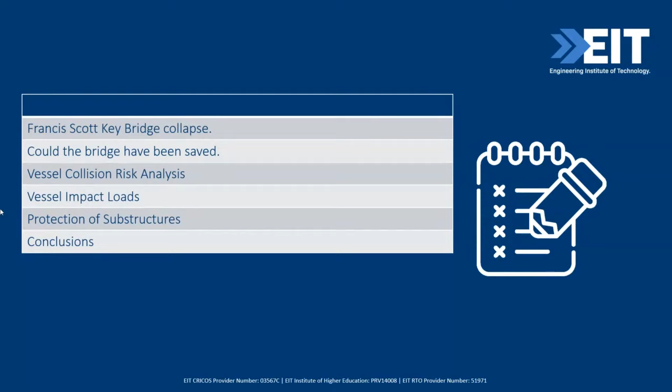As the disaster happened on March 26 this year, 6 weeks ago, at about 1:30 a.m. local time, a container ship hit one of the pillars of Francis Scott Key Bridge, which had an overall length of 1.6 miles crossing the Patapsco River in Baltimore. This collapse caused 8 construction workers and 3 vehicles to fall into the water. Unfortunately, 6 people were reported missing, out of which 3 bodies were recovered and the other 3 are presumed dead. 2 people were rescued from the river; one had no injuries, while the other had to be taken to the hospital and survived the disaster.

For the structural collapse, all 3 main steel truss spans collapsed together with 3 approach girder spans on the northern side.

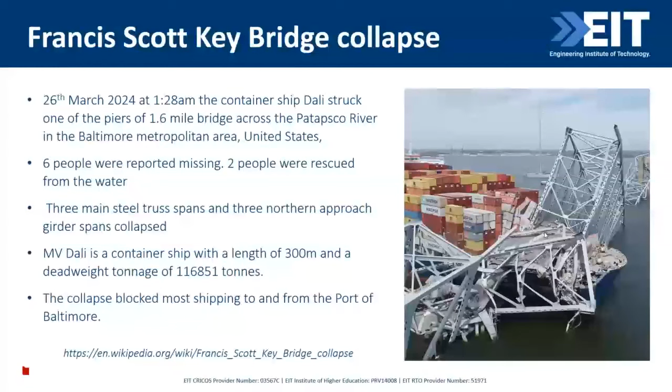The bridge collapse blocked most shipping to and from the port of Baltimore for a few weeks. On top of this, the traffic needed to use alternative ways.

Now, the Francis Scott Key Bridge was a steel arch continuous through truss bridge that spanned the lower part of the Patapsco River and outer Baltimore Harbor. The Key Bridge was named after the author of the U.S. national anthem, Francis Scott Key, who was believed to be near the site of the future bridge at this time.

He was there in 1814, serving in the army. When observing the bombardment of Fort McHenry nearby, this battle inspired him to write a poem called 'The Defense of Fort McHenry.' This poem was later set to music and renamed the Star Spangled Banner, which is the U.S. national anthem at the moment.

The construction of the bridge started in 1972 and was completed in March 1977, so about 5 years. This is an important date for our discussion, as the federal regulations for protecting bridges from ship collisions were updated in 1991 after another truss bridge, the Sunshine Skyway Bridge, collapsed in 1980. The existing bridges in 1991 actually were exempt by a so-called grandfather clause.

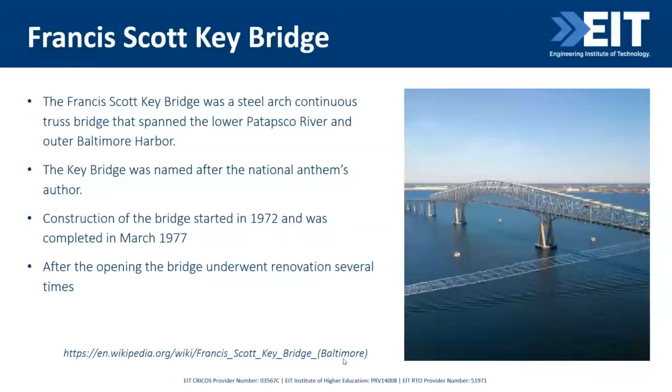A bit more detail on its structural arrangement: the bridge itself spans 1.6 miles, about 2.6 kilometers, over the river, but the overall crossing structure, including its connecting approaches, is almost 14 kilometers long. The steel truss section was 805 meters, with a maximum clearance of 56.4 meters, and the longest span was 366 meters.

It was a very busy bridge. According to the Maryland state government report, on average 11.5 million vehicles crossed it, and in 2023 alone the report states 12.4 million vehicles crossed the bridge.

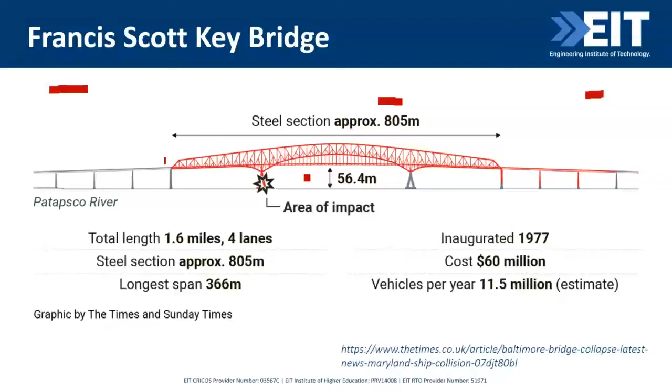Whether the Francis Scott Key Bridge could have been saved is a complex question with no definitive answer. There are ongoing debates among experts. Here is what we know.

The bridge had a fendering system designed to absorb impacts, but the severity of the collision might have overwhelmed it. Some engineers believe stronger defensive measures, like an improved fendering system, could have lessened the damage. Others argue the force of the colliding ship might have been too great for any current technology to fully prevent the collapse. Officials are still investigating, so a clearer picture may emerge in the future.

The bridge's continuous truss is known to be sensitive to progressive collapse type failure. As such, this type of truss has no redundancy against removal of any part of it, in particular one of the supports.

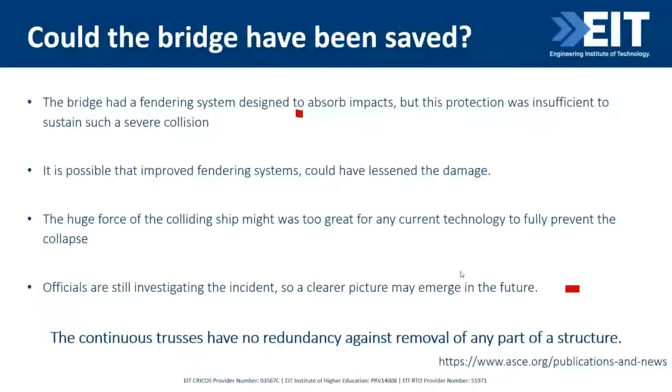I can't turn this video. Why can I not do this? Yeah, right.

At the moment, all the information we have is the video footage of the collapse, and this fits the concept of progressive collapse clearly. You've seen this footage, many different videos released over the internet. This is the main one.

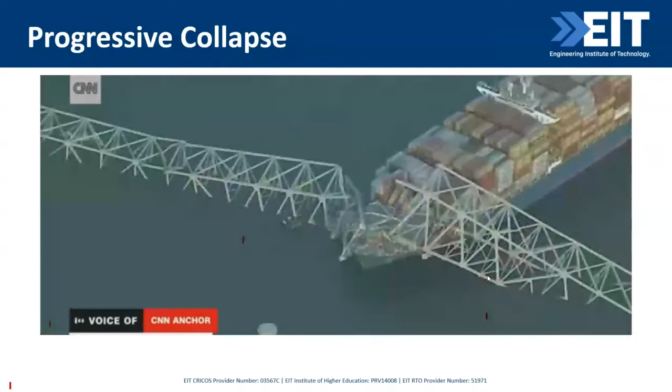Let's restore the chain of events. I will use this schematic representation to follow the collapse stages through. Here's the bridge with the main truss and the main dimensions for the truss part.

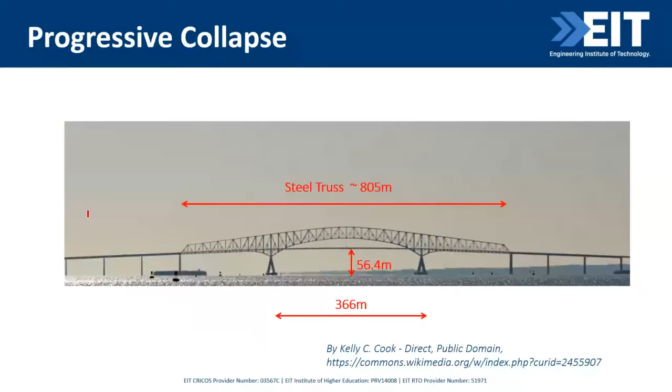This structural form is a combination of an arch bridge and a suspension bridge. The continuous arch structure — that's the truss structure here — and about the supports, provides the horizontal thrust for the arch structure. This is the arch here, and it's designed to reduce the thrust as well.

Instead of an arch supporting the structure from below, the arch here rises above the road, and the vertical ties descend to increase support of the decking. It's an extremely strong arrangement because the arch design allows the forces from the deck to go to the arch through hangers, which means no single part of the bridge takes on a high amount of pressure, and as a result isn't designed to handle it.

So we see here the trade-off — advantages which turned out to be disadvantages in terms of the progressive collapse issue.

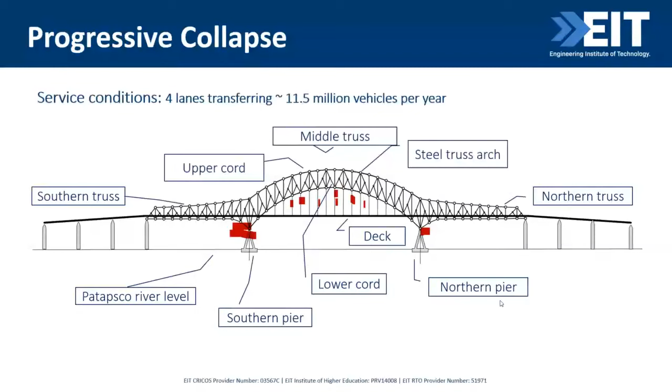So what happened? The cargo ship loses control and collides with the southern pier. Though the ship wasn't built for speed, it was going relatively fast — about 8 knots, roughly 9 miles per hour. That doesn't sound like much, but with a weight of over 116,000 tons, even at 8 knots, the sheer mass of the Dali threw a massive amount of force against the bridge support. The bridge support was a structure primarily designed to withstand downward forces, not sideways forces.

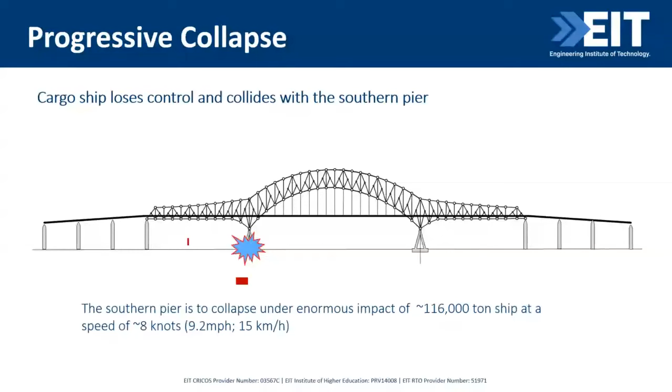Under this collision force, the pier collapses and is essentially completely removed. The southern truss — this is south, this is north — the southern truss buckles and fails.

The whole truss moves sideways due to this. It all happens in a matter of instants, fractions of a second. The northern end lifts off the pier, no longer connected to it, and the whole structure rotates over the support.

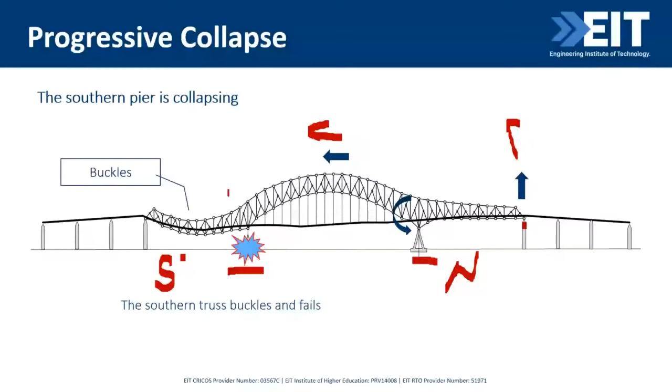The support then acts as a pivot, exerting additional force on the pillar. The members of the truss now experience forces exceeding their design capacity and fail while the whole truss is already in the air.

Next, the southern truss collapses under the sideways force and falls into the river. The middle span is no longer supported, and with no support on the left, it becomes a cantilevered end, and it breaks at the top chord here.

You can clearly see the structural arrangement changing. This truss was not built to withstand these tensile stresses at the top chord at all.

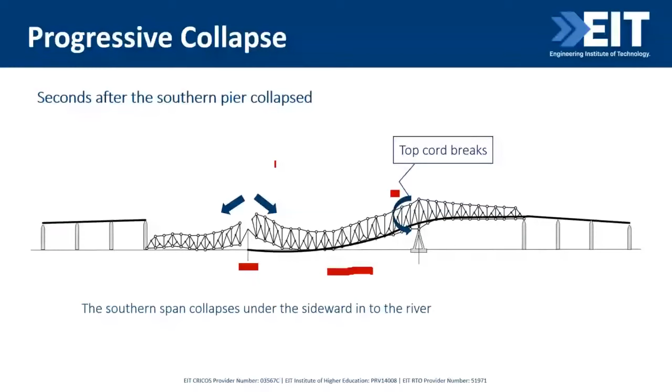The middle span then snaps, immediately near the northern pier. The top chord breaks and it all falls into the water. The remaining sections of the northern truss pivot backwards, causing the failure of the approaching girder spans — causing the failure of these parts as well.

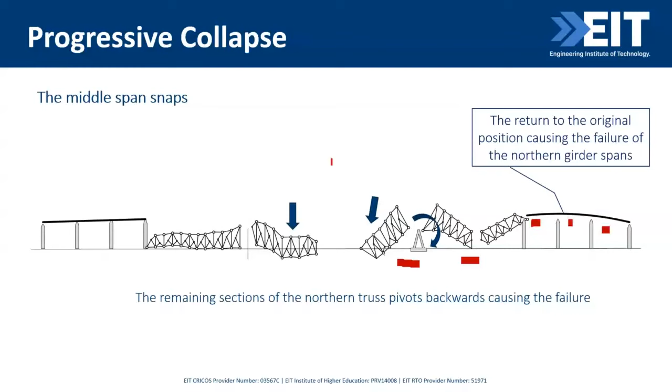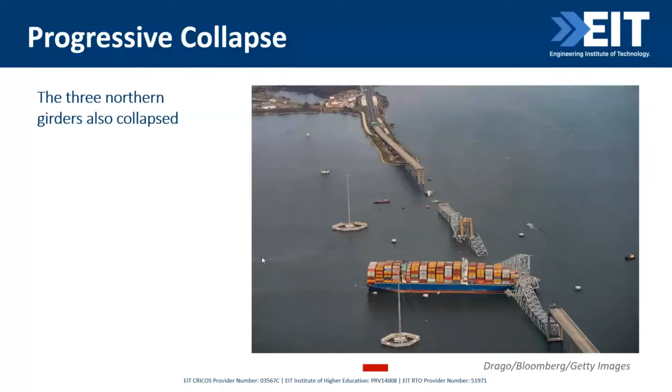The three northern girders also collapsed into the water, and that's what we see at the end. As you've seen in the video, all this story took less than a minute. That's the essence of progressive collapse, and that's the problem of truss bridges, especially continuous truss bridges.

However, it wasn't the first time this type of bridge and this type of failure occurred in the US. In May 1980, a freighter ship ran into one of the bridge piers of the Sunshine Skyway Bridge at Tampa Bay, Florida. Here on the picture, before and after. The bridge was very similar in dimensions, actually 366 meters, and similar height, but it was more disastrous. 35 people were killed in this disaster.

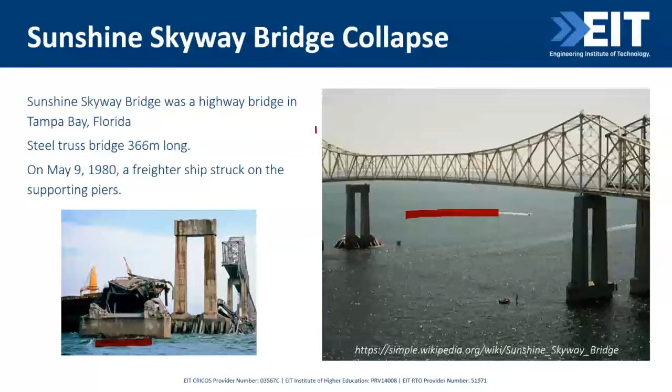Even more recently, a couple of cases in 2013, just 10 years back, a freight truck struck the overhead structure of the Skagit River Bridge, a truss bridge in Washington state, causing a partial collapse, but extraordinarily killing no one there. So all this, as we see, wasn't really new for civil engineers or bridge engineers.

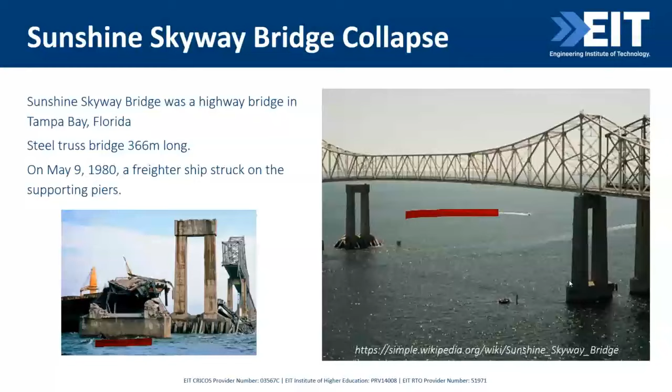The Sunshine Skyway Bridge was rebuilt, but using different structural forms. The new bridge uses a cable-stayed structural form, for a couple of reasons. The main one is that it provides higher redundancy levels and provides longer clear spans.

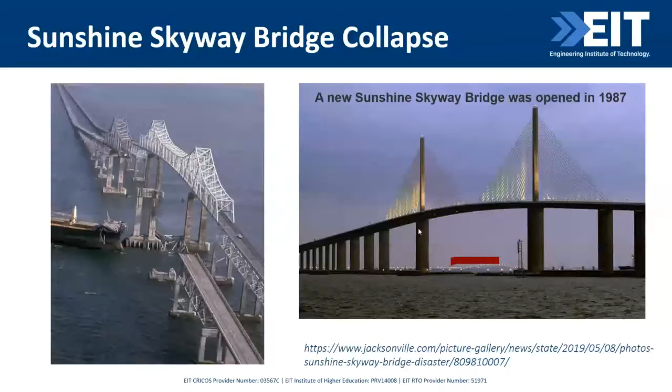In response to the Sunshine Skyway Bridge collapse, AASHTO set new standards for highway design and construction in the US, addressing vessel collision with support piers. And that's what we want to look at next, to show you how AASHTO sets out the recommendations for modern design of bridges for vessel collision.

In navigable waterways where vessel collision is anticipated, structures shall be designed to resist these collision forces. The vulnerability of a bridge to vessel collision is affected by factors including waterway geometry, water stage fluctuations, current speeds, weather conditions, vessel characteristics, navigation conditions, vessel size, speed, loading conditions, and bridge parameters such as bridge size, location, horizontal and vertical geometry, structural redundancy, and effectiveness of existing bridge protection systems.

Vessel collisions with bridges are extreme events, associated with a great amount of uncertainty, especially with respect to the impact loads involved. As with other types of extreme events, it would be too conservative and not economical to design the bridge for the worst case scenario. That means a certain amount of risk must be considered acceptable. The design objective is to minimize, in a cost-effective manner, the risk of catastrophic failure of a bridge, reduce the risk of vessel damage, and environmental aspects should be taken into account as well.

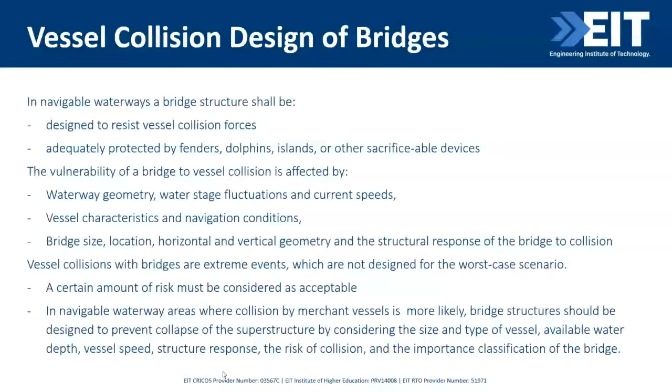AASHTO provides three alternative design methodologies: method 1, 2, and 3. Method 1 is a relatively simple, semi-deterministic procedure for selecting the design vessels and computing the collision impact loads. It's particularly useful for shallow river waterways, where the vessels or barges are approximately the same size, so the forces can be easily estimated in a more accurate way.

Method 2 is a probability-based risk analysis. This procedure can be used for directly assessing the risk of collapse from vessel impacts and developing vessel impact criteria for the design. In method 2, a mathematical model is developed to estimate the annual frequencies of bridge collapse, and the probability of accidents leads us to the predetermined acceptance criteria.

Method 3 is the cost-effectiveness procedure, where the benefit-cost analysis is combined with the risk of a potential bridge collapse to determine the applicable design vessels. Method 2 is the preferred procedure, which we will discuss next.

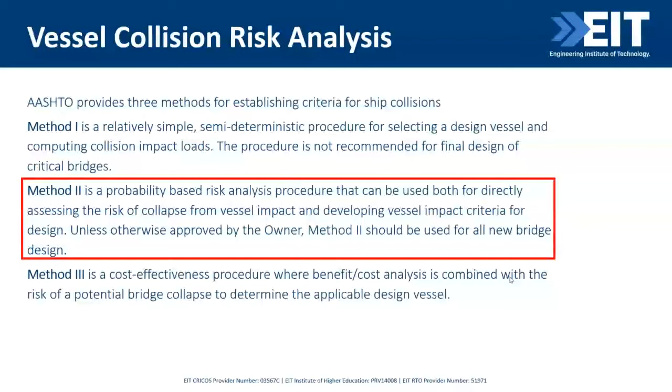In general, the occurrence of collision is separated into 4 events. A vessel approaching the bridge becomes aberrant. The aberrant vessel impacts a bridge element. The bridge element that it hits fails. And the protection factor based on bridge location and nearby waterway features.

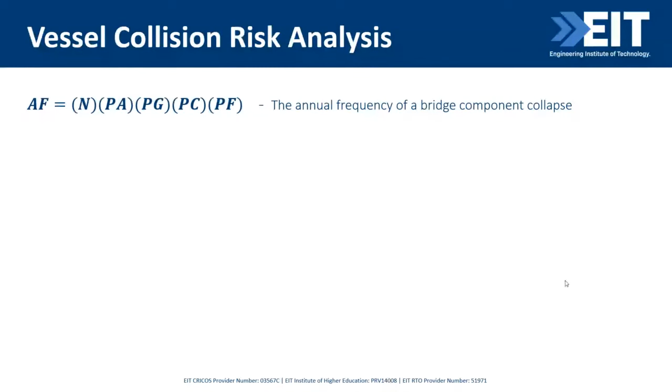So the AASHTO risk equation shown here provides the annual frequencies of collapse for single bridge elements in terms of these factors. PF, the protection factor, accounts for land masses or nearby structures that may be able to protect the bridge. PC is the probability of collapse, providing the probability of collapse for the whole bridge if a bridge component is hit by an aberrant vessel.

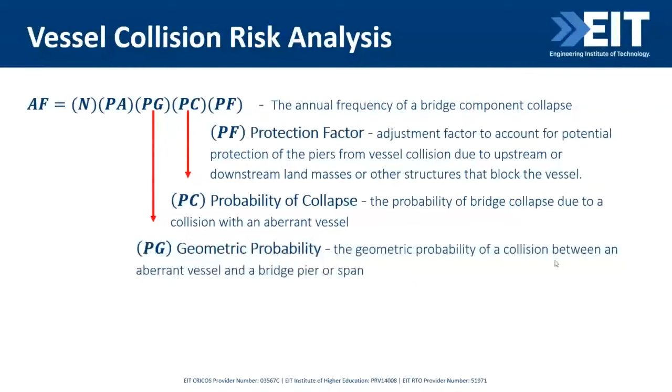PG is the geometric probability, the probability that an aberrant vessel will hit a part of the bridge. The next one is PA, probability of aberrance, a measure of how often a vessel might go off course. The last one is the annual number of vessel trips classified by type, size, and loading conditions that use this particular water channel and are able to strike the bridge element.

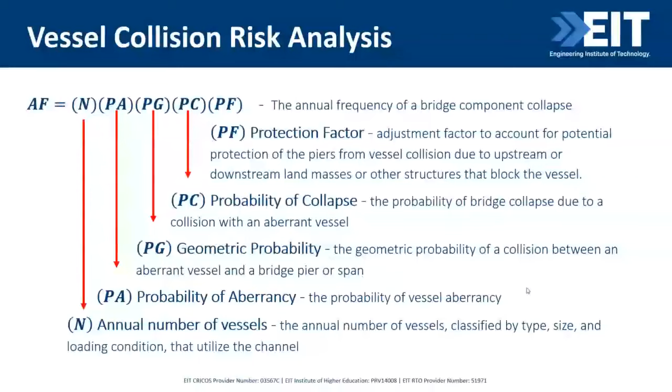Once all this input information for the analysis has been collected and developed, the previous coefficients, which is usually the most time-consuming part of the process, the risk evaluation can be made up by summing these factors, these analysis factors for each bridge component, for each vessel separately, and transit path in the analysis is formed.

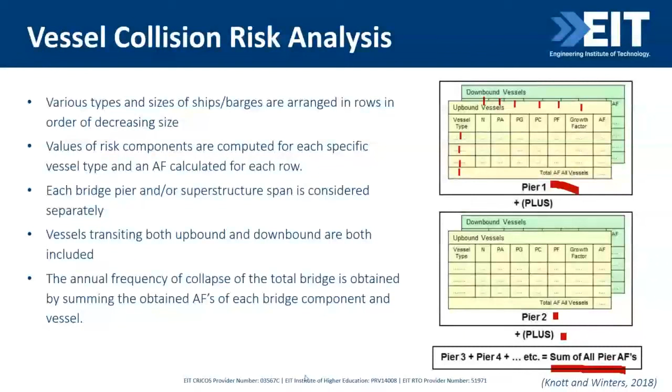Once we calculated all annual frequencies of bridge component for all conditions, I'm just repeating this part, we sum them up and obtain the annual frequency for the overall bridge. So this frequency, this AF, if we inverse this annual frequency of collapse, we will get the return period in years of the failure event.

A similar approach for risk assessment is used in other areas of structural engineering in terms of extreme events: earthquake engineering, blast, the protection for blast loads, and so on.

AASHTO provisions specify the annual frequency of collapse at 0.0001 for critical bridges, and 0.001 for regular bridges. Critical bridges are defined as those bridges that are expected to continue to function after the major impact, due to importance level. So there's the same idea of importance levels popping up here as well.

We've seen this in different areas of structural engineering as well. These annual frequencies will correspond: this and this will correspond to 1 in 10,000 years, and this one is 1 in 1,000 years respectively. Obviously this does not imply that the structure is expected to last 10,000 or 1,000 years, but that during this nominal design life of the bridge, say 100 years, the risk of collapse due to collision by a vessel in the design fleet will be very small. That's the idea of this.

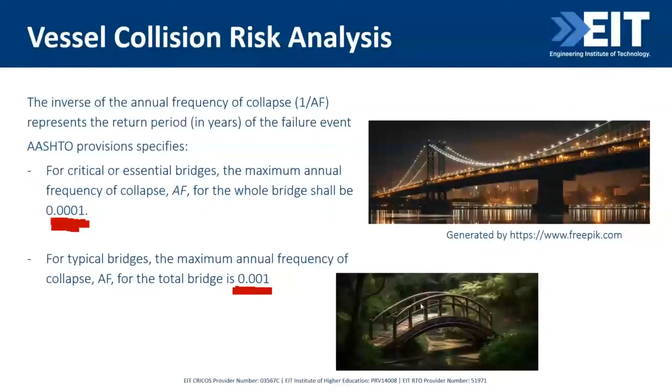So the number of vessels, we haven't discussed this one yet, and I just want to go through all these factors briefly to show how we calculate them. We'll start from the number of vessels that could potentially strike a bridge element. It's based on available water depth and actual draft of the aberrant vessel. Again, we need to specify a number of possible vessels there, which should be assessed based on the current conditions there.

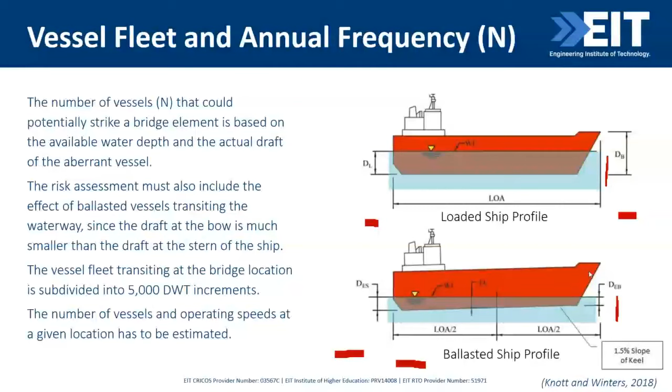The probability of aberrance, PA - let's go quickly through these different factors to understand what they mean.

We don't have much time left, huh? We wasted too much time at the beginning, right?

The probability of aberrance is a measure of risk that a vessel is in trouble and may stray off course as a result of pilot error, adverse environmental circumstances, mechanical failure - whatever happened to the MV Dali in our example. AASHTO offers the following approximate method. To calculate this PA, we have a number of different factors which can be found in the standard, which we will look at.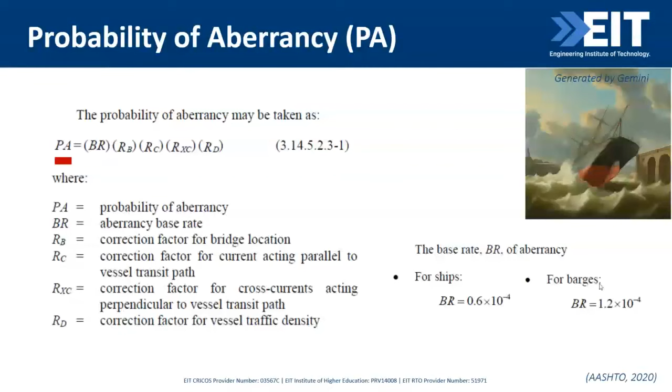Probability overall - the BR, aberrancy base rate, based on historical accident data of waterways. The RB correction factor for bridge locations is computed based on the relative location of the bridge to one of three waterway regions: straight, transition, and turn bend. Depending on where the bridge is on the waterway, this RB will take different values.

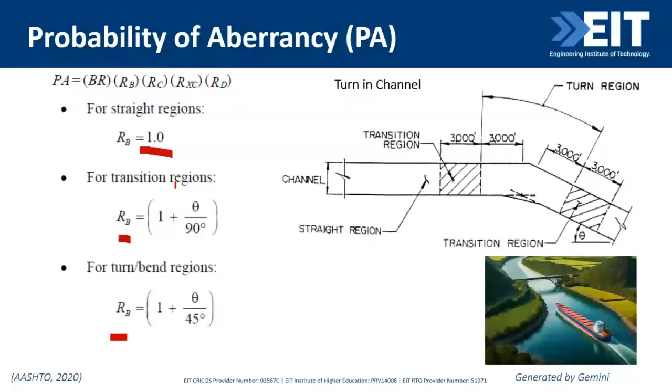It's based on the geometry of the channel and the position of the bridge on it. Next are the correction factors for currents acting parallel or perpendicular - depending on the way the bridge is set and the water currents there. You also have ways to calculate this RC factor, taking into account current velocity components and so on. All this is described in AASHTO, in the standard.

I will probably rush through this. The main idea here is that bridges should be designed to cross the navigation channels at right angles, and they'd better be symmetrical with respect to these channels.

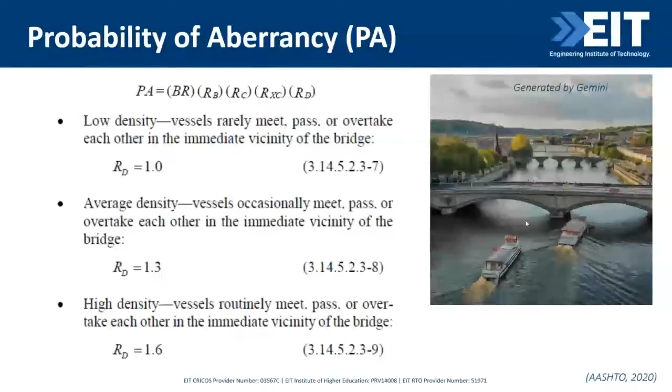Next is the probability of aberrancy - RD, the correction factor for vessel traffic density. In the immediate vicinity of the bridge, this is determined by whether the structure is located in a low, medium, or high density area. For this, we use the geometric probability, as shown in these schematics.

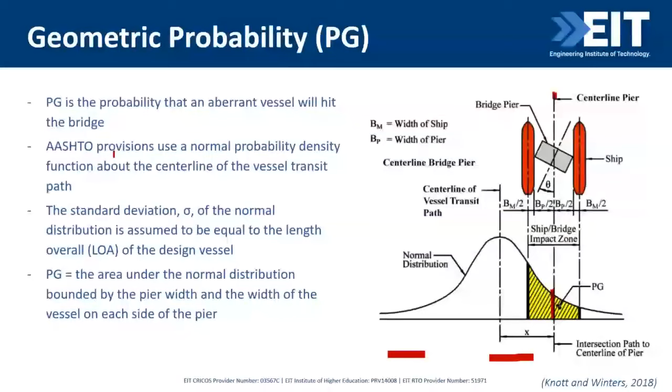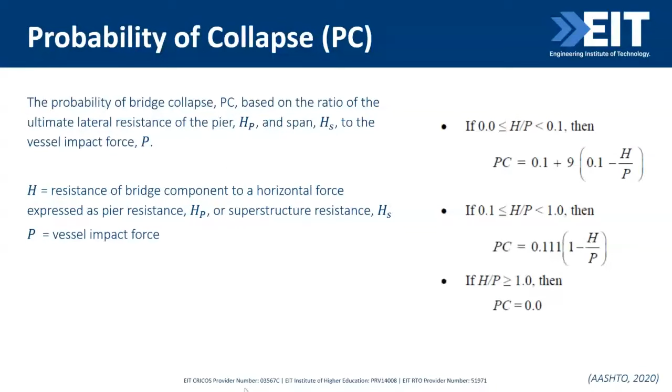The protection factor is used to adjust the annual frequency, AF, for full or partial protection of the bridge piers and its span components. It's taken regardless of actual water depth, and this is where we take into account protection measures or shielding associated with existing conditions - for example, protection measures which we'll look at shortly, or existing upstream or downstream natural protection, such as a shoreline or peninsula extending out. This all provides natural protection in addition to any artificial protection we want to provide.

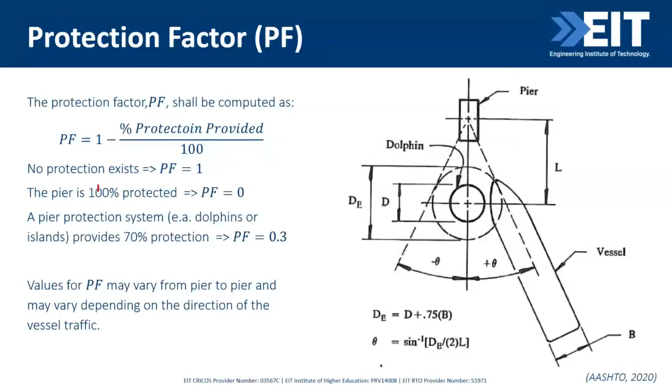So all this protection factor is actually calculated for all the different means of protection, and then it's also evaluated as a probability distribution in this case.

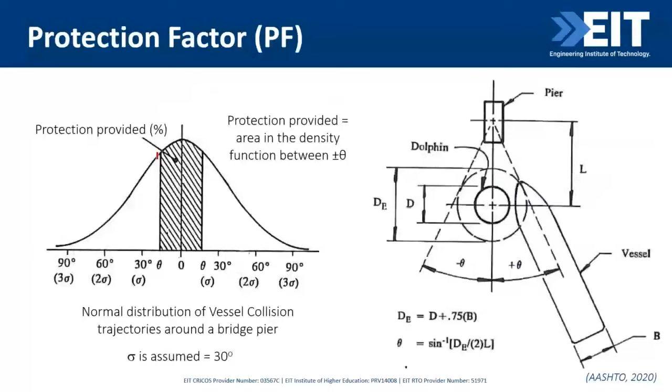So the next step is to estimate the impact loads on the bridge pier during a ship collision. Again, it's a very complex problem. The actual force depends on time, the ship collision forces. But as we commonly do in structural engineering, we use equivalent static forces in this case, applying them statically. So we need to know two things.

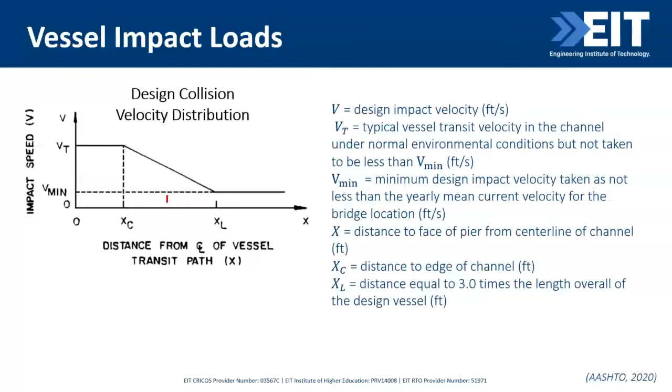So the hydrodynamic mass coefficient is taken here as proportional to the increasing vessel displacement tonnage, W in this case.

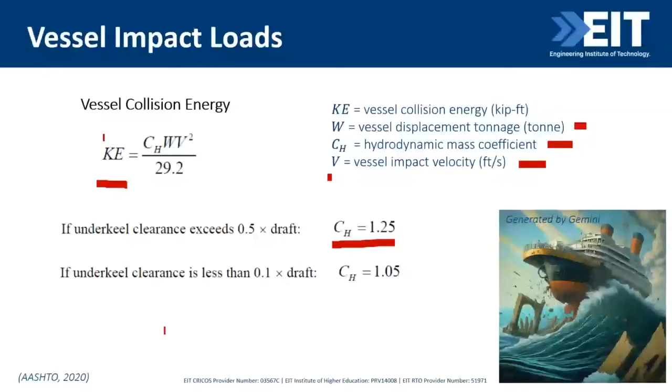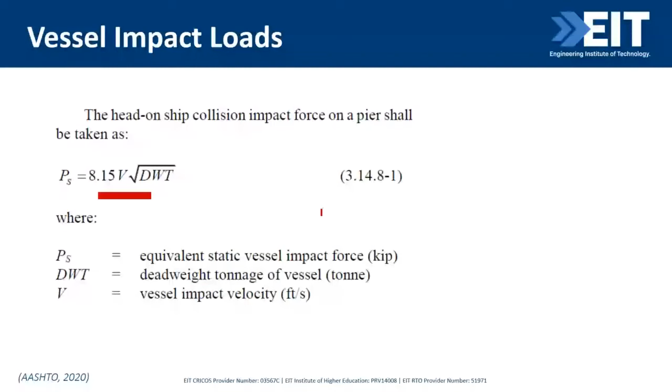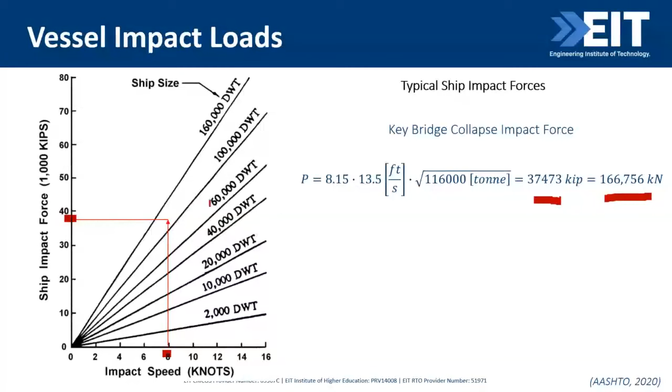So there are formulas for computing the design ship collisions for lots of different situations. For some different reasons we're running very much out of time, so we'll probably skip a couple of slides.

So the impact loads for different types of loads: we've got ship bow impact force, deck house impact force, and so-called ship mast impact force. All these expressions can be found in AASHTO.

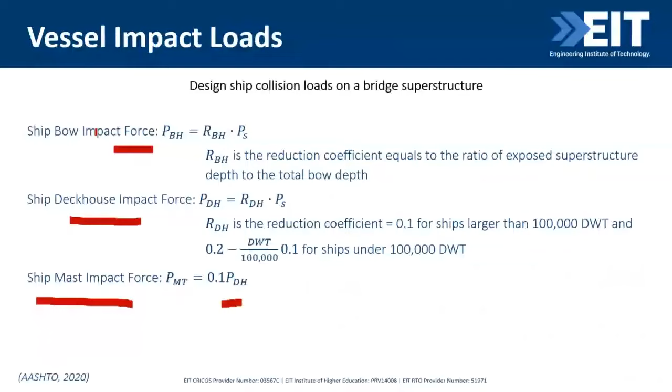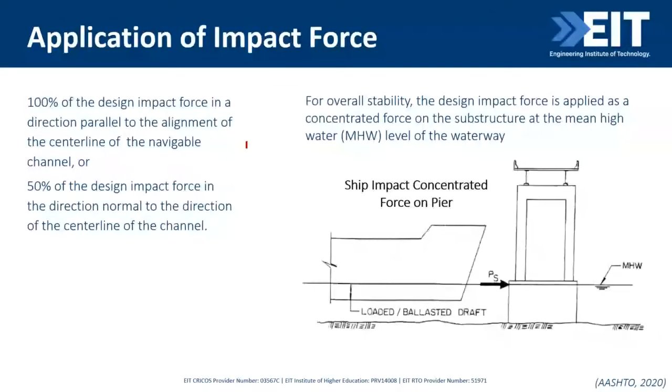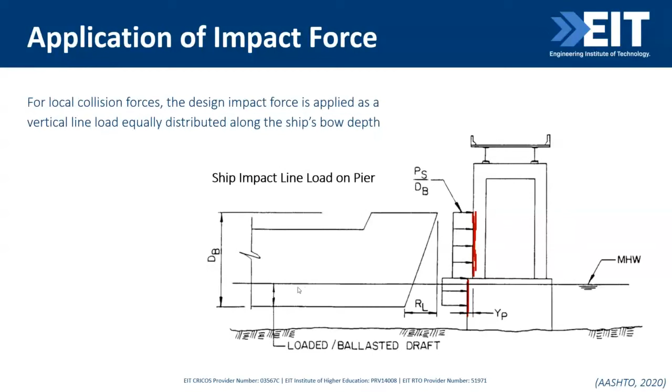Another part I wanted to show you is the protection of the bridges, so protection of substructures. Piers exposed to vessel collisions can be protected. These special structures are designed to absorb the impact loads or redirect the aberrant vessels away from the pier—so-called deflection walls. The same idea is actually used for road bridges or railway bridges as well, where it's called deflection walls.

So large forces and energies are involved in this vessel collision, so protection structures are designed for plastic deformations and to dissipate these energies. General types of physical protection include fender systems, pile-supported structures, or dolphin protection systems, island protection systems, and floating protection systems. The first one here is the fender system, usually consisting of timber, rubber, steel, or concrete elements—you see them here and here—designed to fully or partially absorb this impact load. The load and energy absorbing characteristics of this system are relatively low.

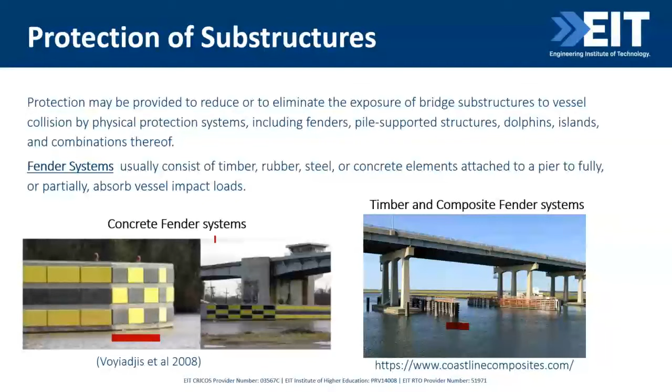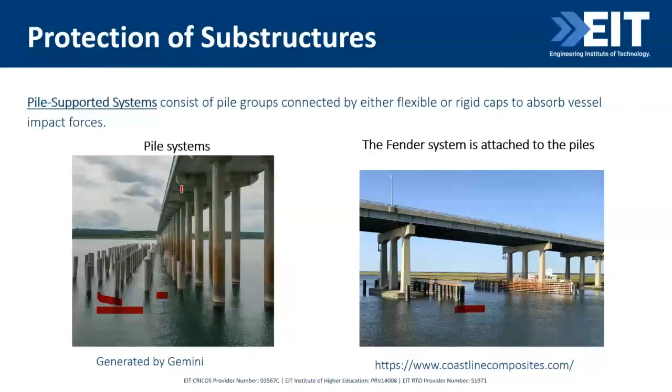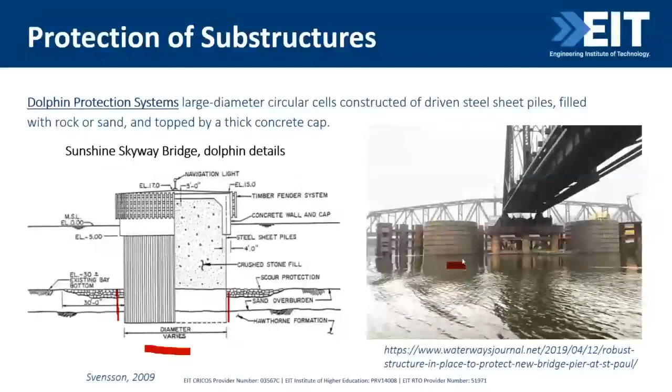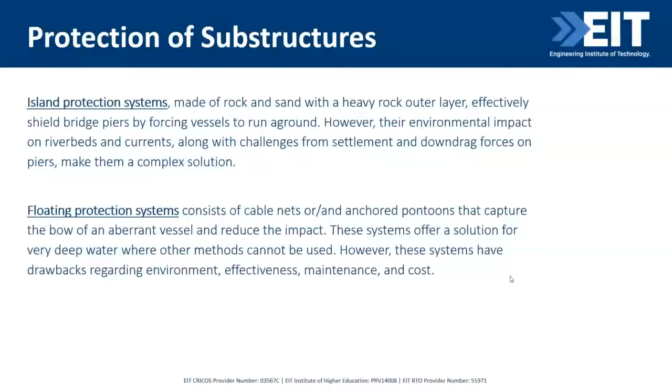My personal answer to this question—could the Francis Scott Key Bridge have been saved—I will answer no. This particular type of bridge, especially when subjected to such an enormous impact force, could not have been saved. The bridge type and bridge protection system should be considered during the initial planning. Rather than protecting from the coming disaster, we need to foresee this. The initial planning—the type of the bridge, its location, and the protective system—was not planned properly there. Probably for that time, it was okay.

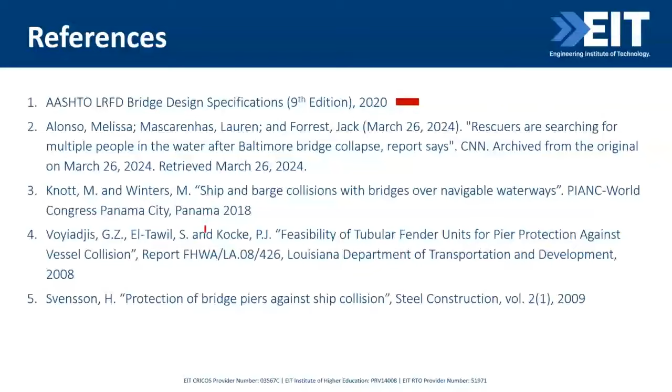Yeah, well, those are the references I've used in this presentation—the main one is AASHTO, plus some other references as well. Thank you. Sorry for being a little bit late at the beginning. Thank you for listening.